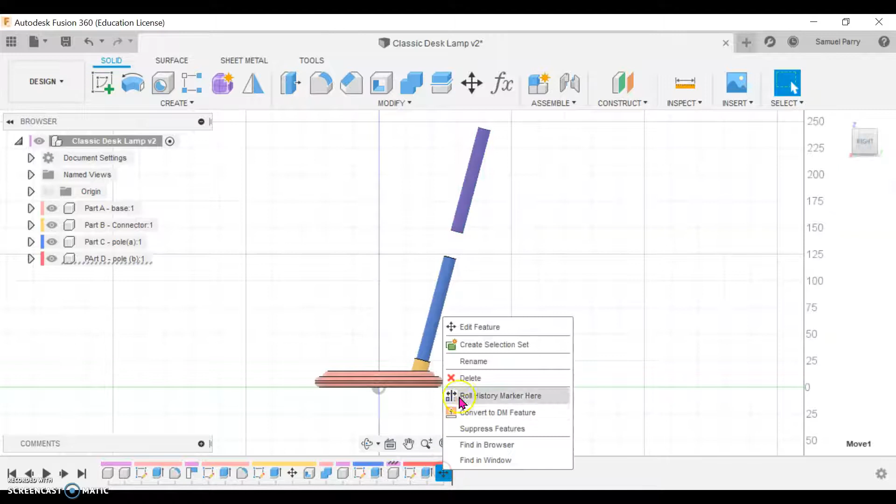You may have finished the last session with something that looks a bit like this, and I spoke to you a little bit about the move tool. If your drawing looks like this for now, I recommend you just delete the last move here from the timeline, so that will undo it, and you have your part like this to begin with.

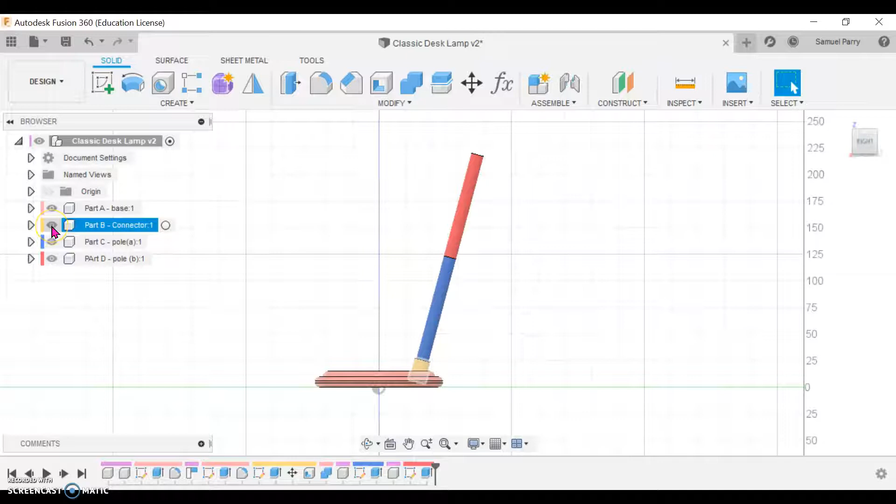Now then, what we're going to do is draw onto the bottom part of this component, but at the moment these parts are in the way. So what I'm going to show you is that this eye icon is for the visibility of certain parts. If I press this one, that pole will disappear - it's still there, but the visibility is turned off. For this next part, I'm going to turn these three things off, but keep this one on.

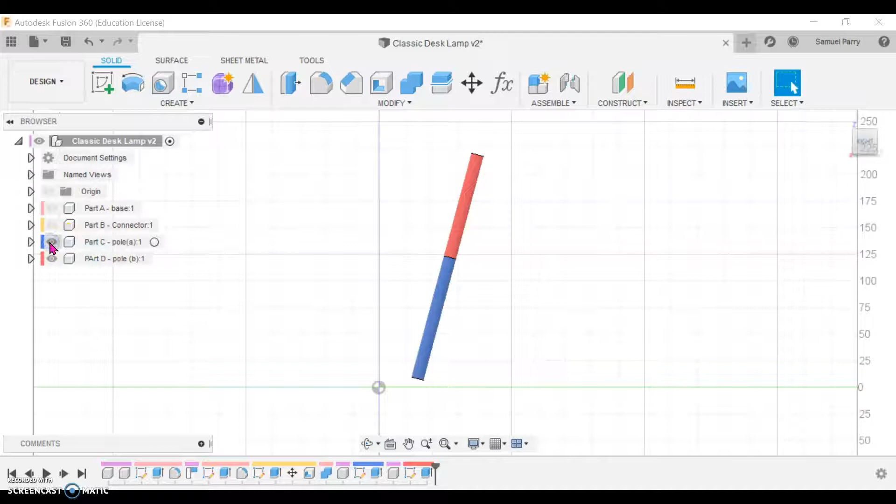I'm going to just quickly check which side that's on by turning it on and off, since I want to draw on this face. I'm going to use Shift and the roller as a button to orientate my view, zoom in, and say new sketch on this face.

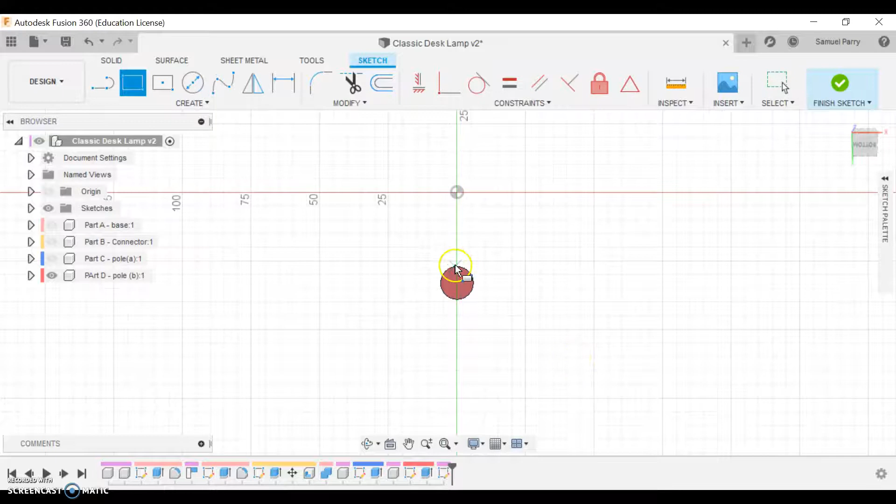I'm going to press R for rectangle, zoom in, and draw a rectangle just on here. I'm not too worried at this stage about the size of it because I'm going to use the dimension tool, which is up here, to dictate the size.

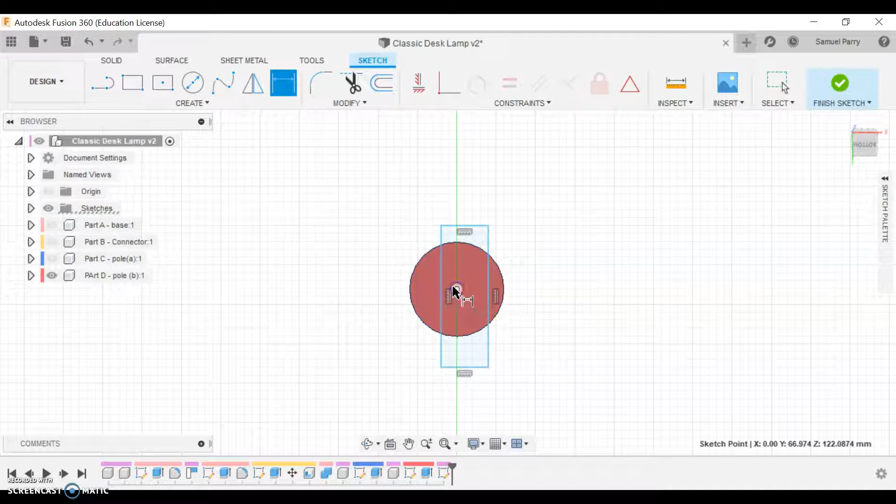I'm going to use the center point of the circle to help me do this. So I'll say the distance from the center to this line - that's 2 clicks, one on the center, one on the line - and drag it up here. I want that to be 2.5 mil.

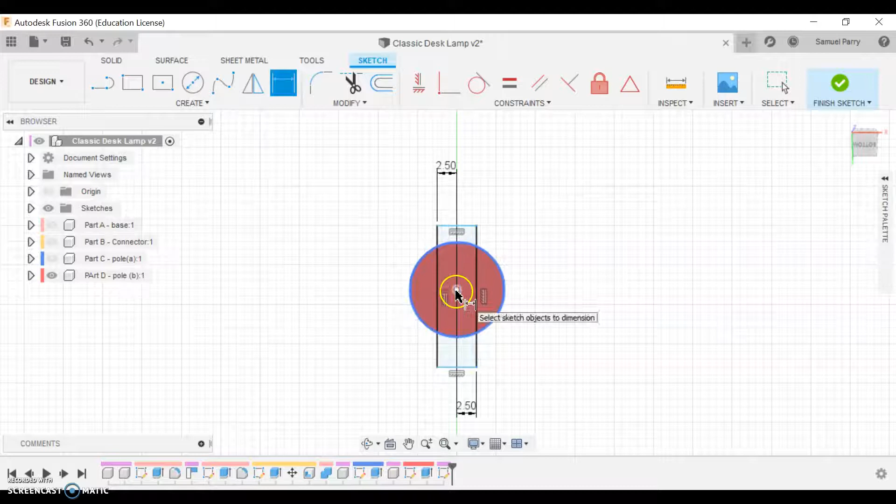I'll press it again and say from here to here, dragging it this way for space, and say 2.5. So it's always 3 clicks: one on the first thing you're trying to measure, move over the second thing and click that, then the third click we move out of the way and click a third time.

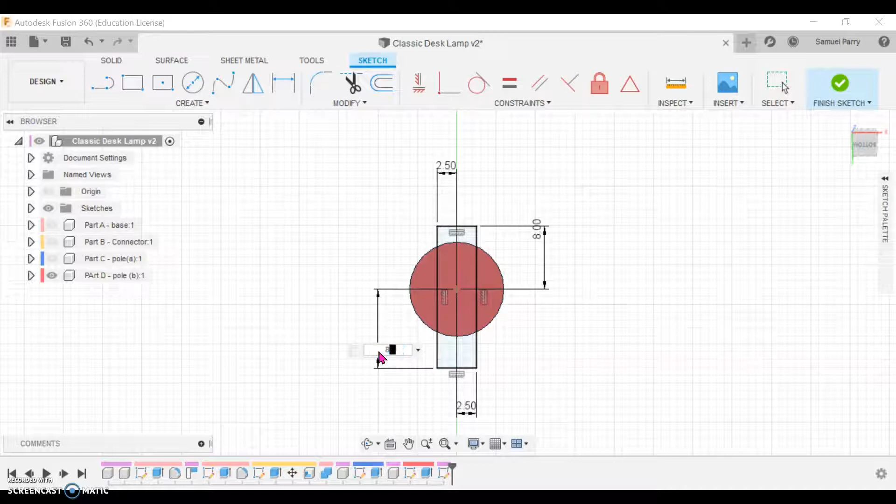I will make this 8 millimeters, and I'll do the same on the other side - from here to here, out this way, 8 mil. So now we have it perfectly central and in line with the center of the circle. It's all very consistent.

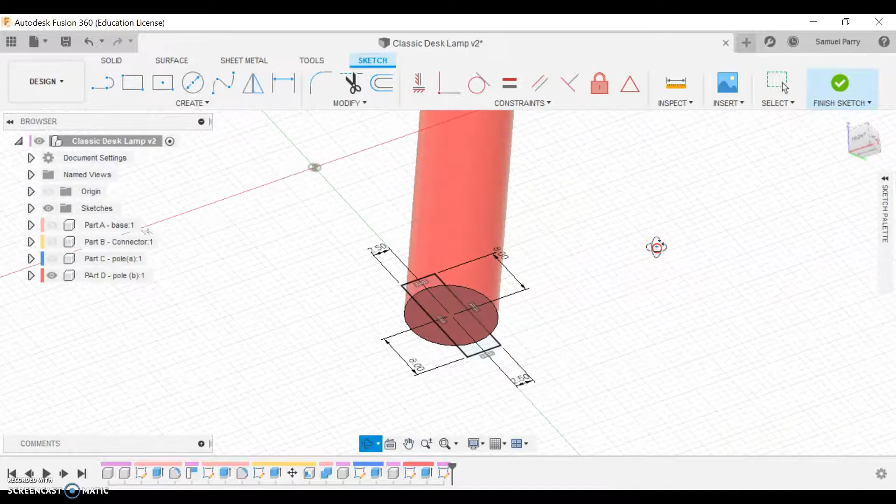Next, we're going to extrude that. I'll use the roller pan feature by pressing the roller as a button to help orientate the view and get it in position. I'm going to press E for extrude, select all these parts of the rectangle, and drag it downwards. I'll turn on this part now so I can see how deep it's going to go into that component, and go 18 or 20 mil - we'll go 20 mil down.

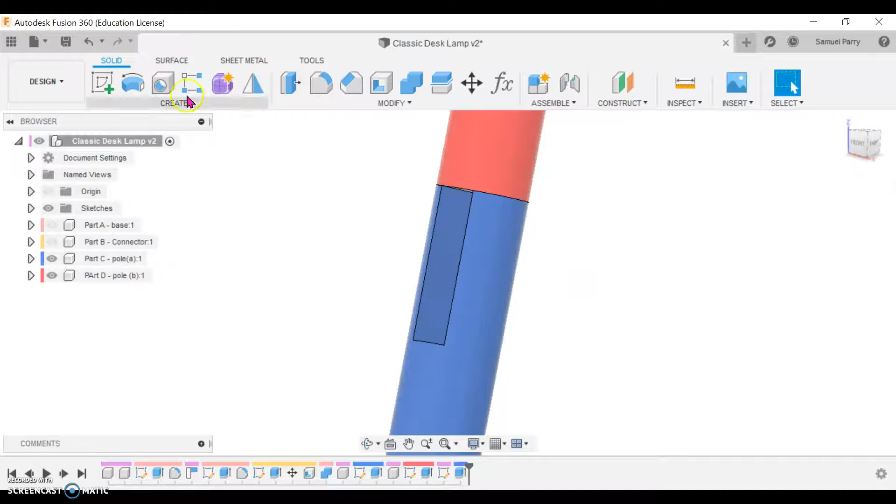Now, something went wrong there. So what I'm going to do is undo that, or double check my extrusion. What happened? If I double click this, it will activate the extrusion. In fact, let me just do an undo and try that again. I'm not sure what I pressed there, and if that happens, I always recommend you undo and try again. So I'll press extrude again.

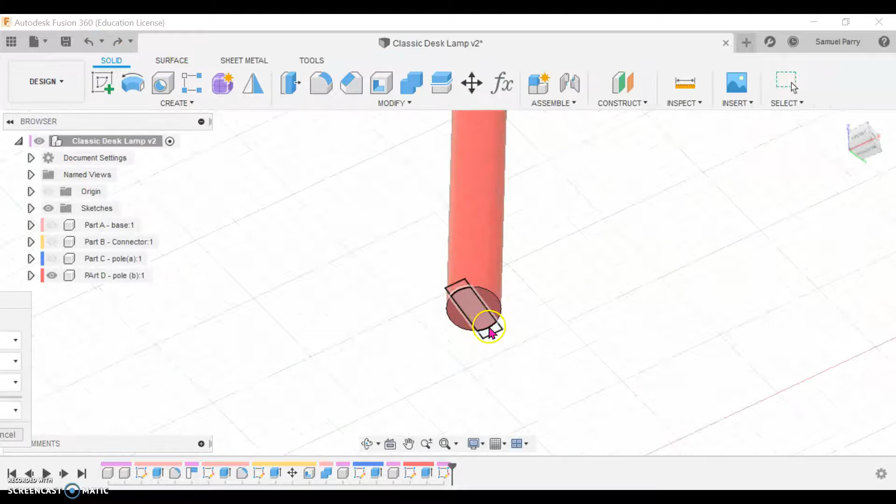I'm going to press those three and bring it down. It might be because my extrusion window seems to have disappeared, so I'm going to bring this over to have a look. Join 20 - that all looks good. I press OK. Not sure why, I must have pressed something by mistake. But if that happens and it seems to not do what you're expecting, just undo a couple of times, try and redo it, be a bit more careful, and it usually then does what you expect. It happens to all of us, so it's worth mentioning.

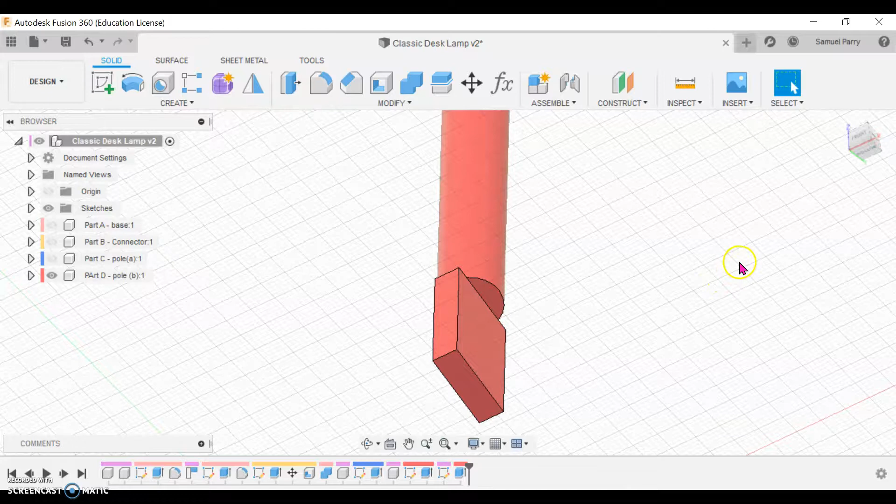So now if I reveal all these again, I have this part that's going to connect into that part there. I'm going to orientate the view, have a quick look to make sure it's as I expect, and use the fit zoom button as well. So this is what you want at this stage.

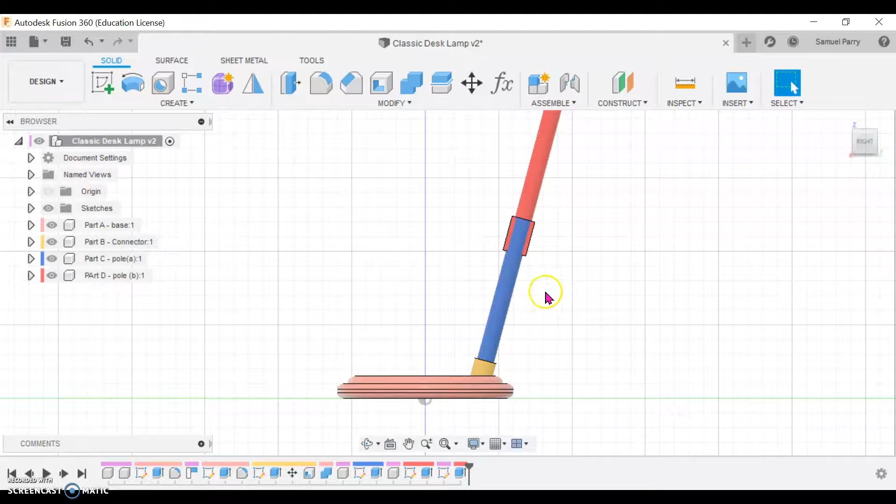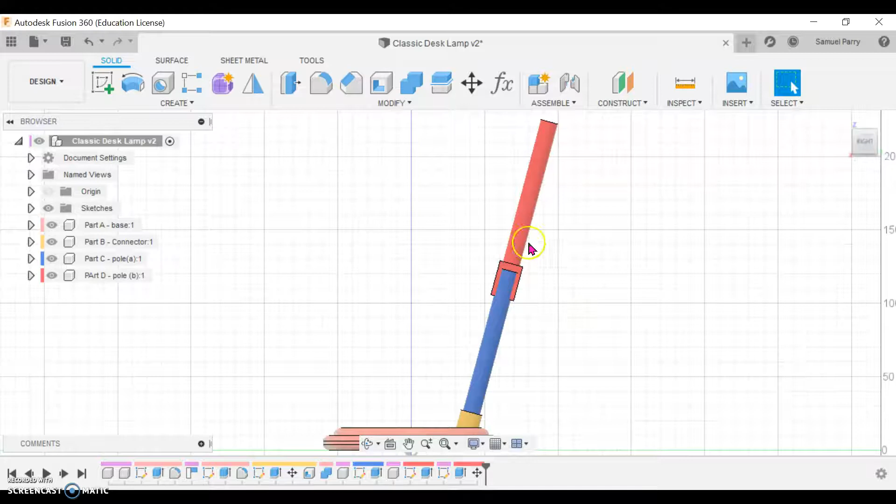What I'm now going to do is move this up a little bit and then use it to cut into the bottom part. So I'm going to use the move tool, select this component, and use this arrow to move it up. 10 millimeters might be a bit too far, so I'm just going to say 5, because I want to use this to cut into this piece, and I want the cut to be quite deep, and then I'm going to move the part.

So I've just realized I'm actually going to delete that, and I'm going to do the cut now. So I'm going to use the combine tool. The target body is this one, the tool body is this one.

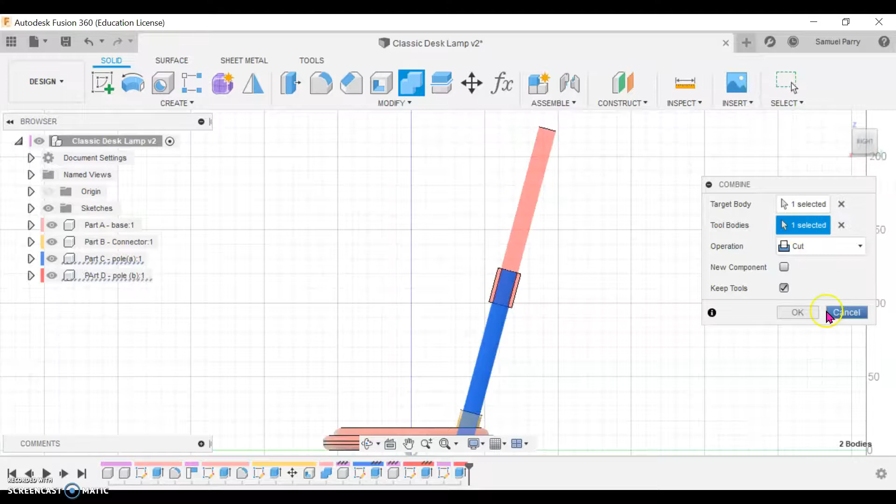I'm going to keep the tool, and I'm going to cut. I'll press OK, and now move it out of the way. I'm going to click that and move it up.

I'll do that up to there just to show you it's cut through, which is what we want. But I want it to have a little bit of clearance here and here, so I'm going to set it to about 5 mil for clearance, and press OK. This is what you want at this stage.

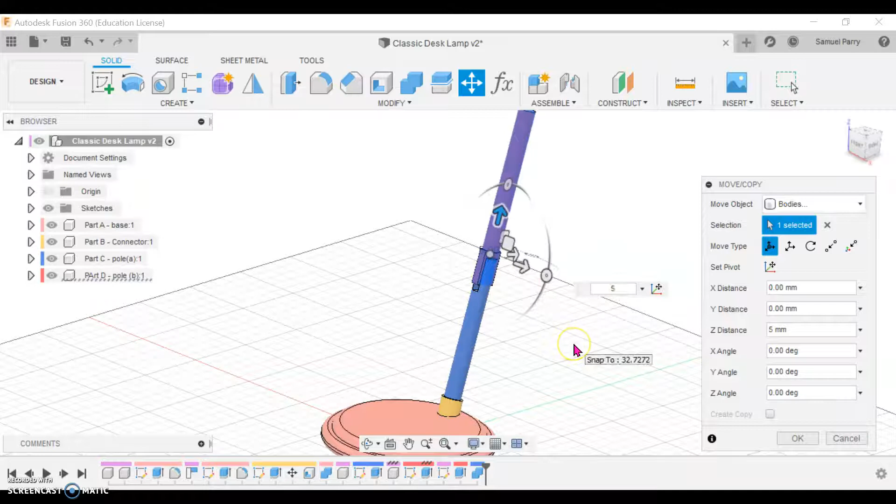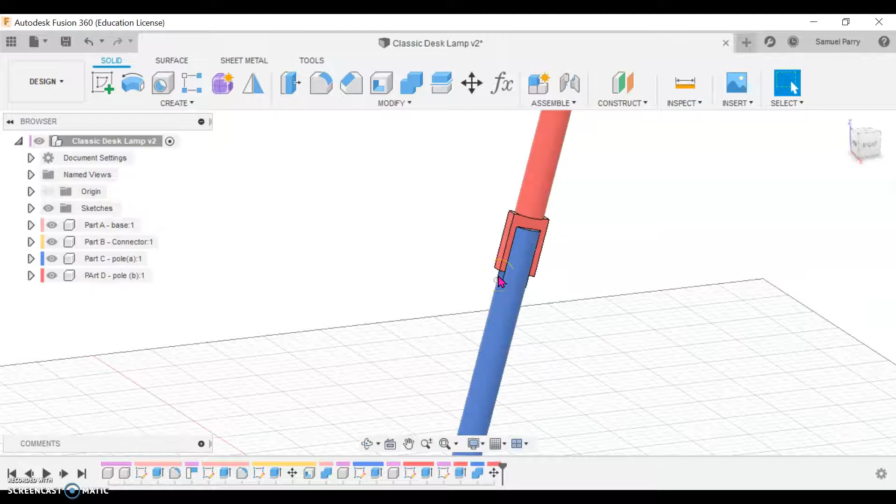So you want to have a groove in this part C, part A, and then part D with this kind of rectangular mass attached to it. We want to cut a groove in here and move it up a little bit so there's a little clearance, and that's what you want at this stage. Once you've done that, you can add a few nice fillets if you like to develop the form.

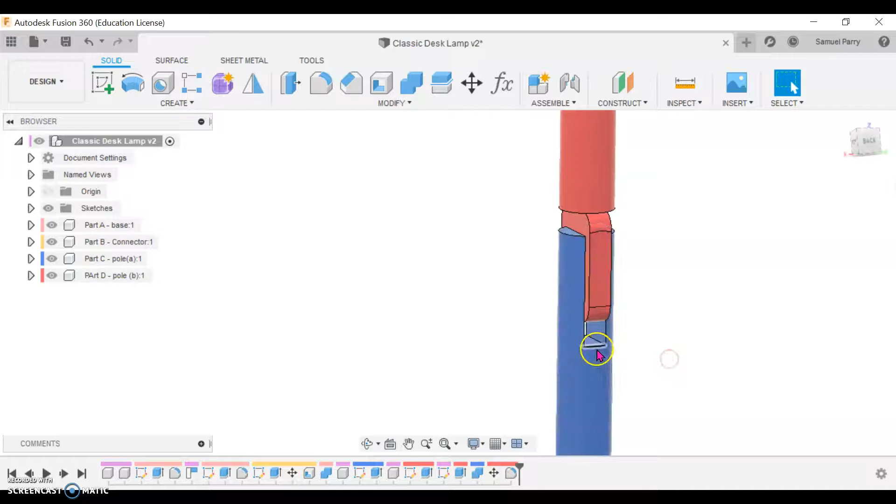We can add some here. I'll make that maybe 5 mil. See how that looks—that looks a bit nicer. I might go 4 mil. I quite like that. I might add some to the bottom part here as well, all around this.

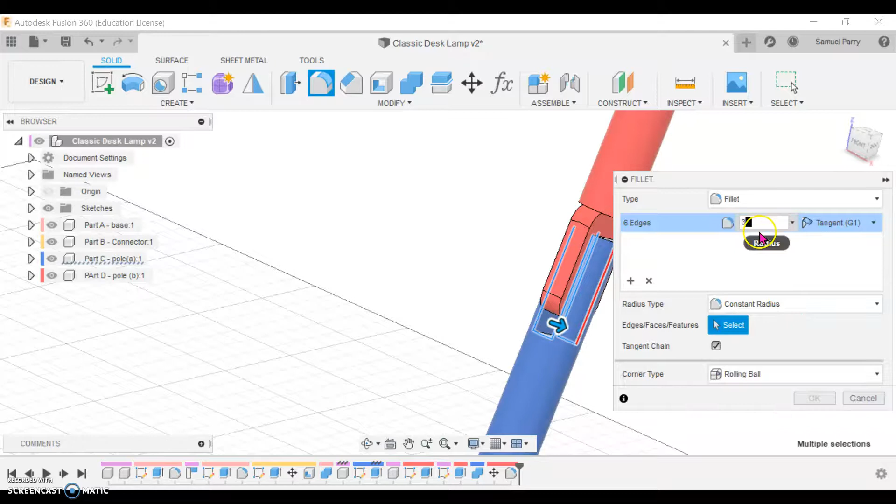I'm going to rotate to the other side and do this at the same time. 3 mil—doesn't seem to like that, so I'm just going to reduce it. If that error message comes up, it's just because the size of the fillet overlaps too much, so you have to reduce it. I've done that down to 1 millimeter now, and the form looks a bit nicer and less bulky, so we're going to go with that for now.

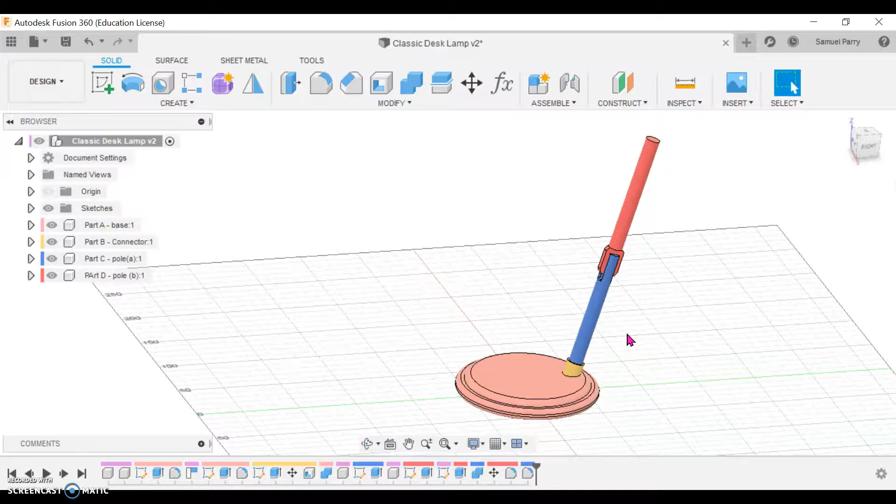Now the next part we're going to do—the idea is we're going to put a bolt through here and eventually have it so this arm can bend, so we can show how it will work. Whenever you have a CAD drawing and your design involves any fastener, like a hinge, a nut, a bolt, or a screw, students in the past sometimes try to draw those out, but it can be quite frustrating. There's actually a nice easy way in Fusion 360 to bring them in from a library.

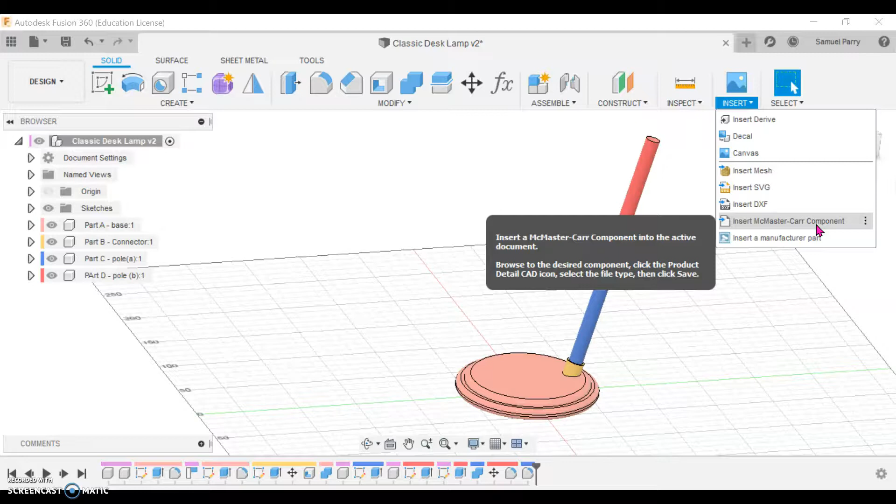It's like buying them from a shop almost and adding them to your drawing. The way we do that is go insert, and it's this part here, insert McMaster-Carr component. As it says, you can browse all desired components and bring in the file and save them in your drawing. So we're going to do that, and what we're going to do is bring in a bolt to begin with. So we're going to search bolt, and we're going to always use metric.

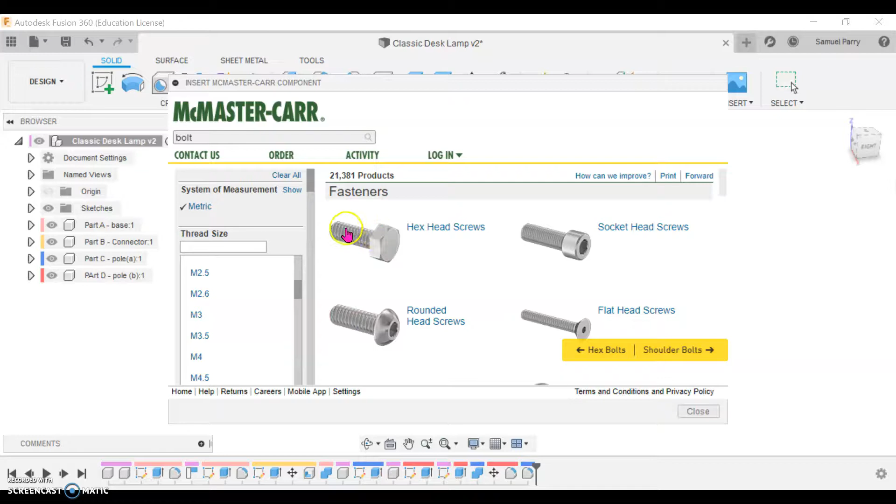We're going to get an M6 bolt, and what that means is the M6 is basically the diameter of this part of the bolt. So we're going to scroll down—we want a 6 mil diameter, so we're going to take that. For this design, we're just going to use a square neck bolt like this, so then you click that. Then in this window we're going to scroll down, and here it has the length of the bolt.

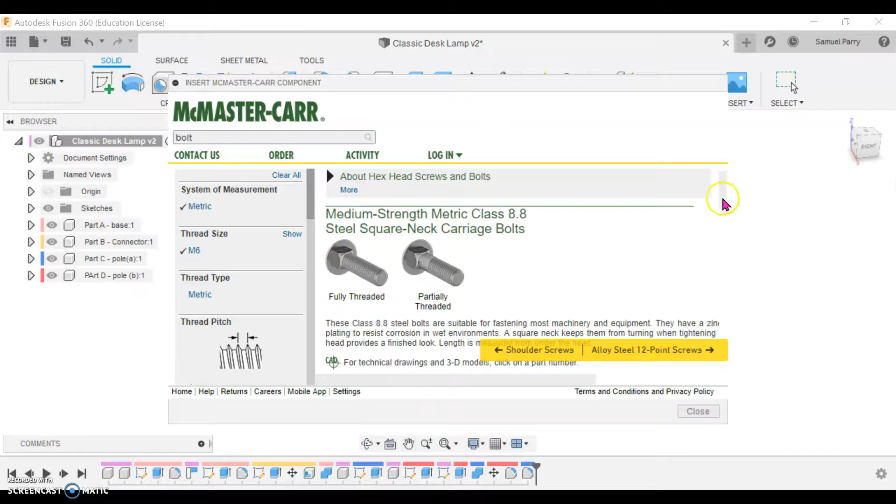So the M6 is the diameter, and this next size is the length of this part. We're going to go down and get a 16 mil one, and click the component here. In industry, I believe people use this in actual shops so you can order it from this company, but we don't want that—we just want the CAD part. So we can go to product detail here.

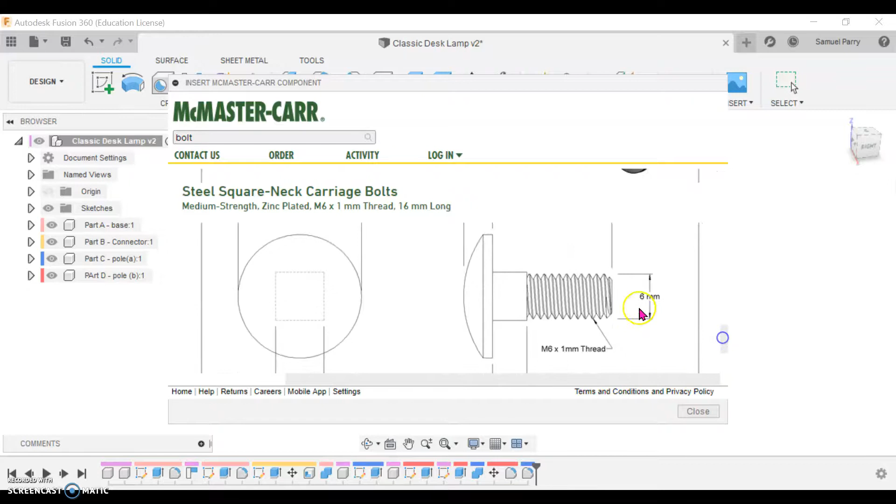And on this window it gives you a bit of a preview—it's quite nice. If you scroll down it gives you an orthographic view as well, so you can quickly check to make sure you've got the sizes you want. As we said, M6 and 16 mil length. But it's this window here you're looking for to download it.

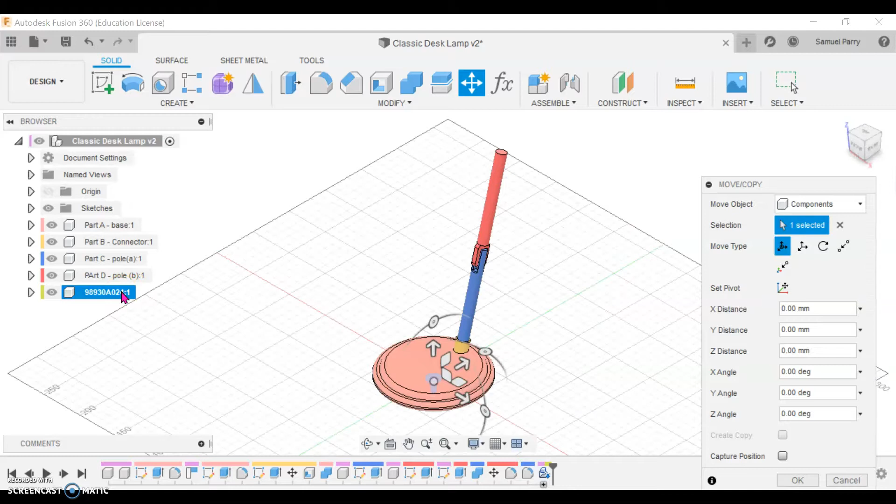So we go here, click that to STEP file, and hit download, and then you'll see a new component arrive. Once it's loaded, that is our bolt, and it's brought it into the drawing. I'll just bring that up, press return, and there's the bolt that we have just ordered, if you like.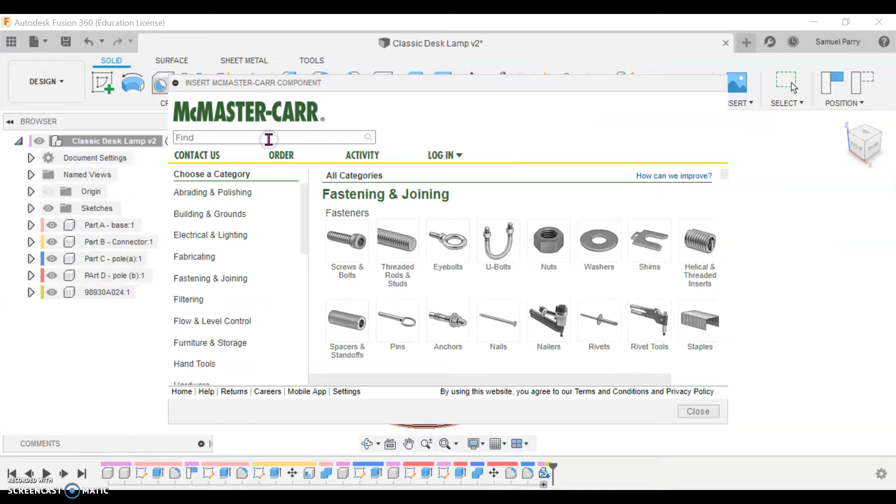So for this drawing we're going to bring in two components. We're going to bring in a wing nut to go with that, so we're going to go through the process again: insert McMaster-Carr, and type in wing nut. We're going to go metric again, M6—we want this M6 diameter again. And with this one I'm just going to take this top one here.

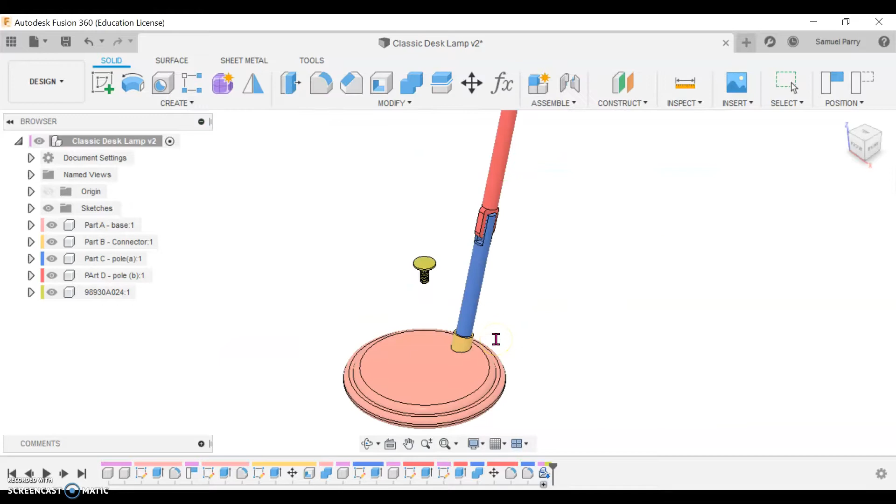I'm going to go product detail, step file, that's what we want. Hit download, and there we have it. And press OK. That is it for today's tutorial.

I hope that's useful. Next time we're going to look at how we create a new work plane to help us draw a hole that will go through this and position these where we want them, and then use the bolt to cut the square in the side of the component of this pole as well, to help us with that fixture. Okay.